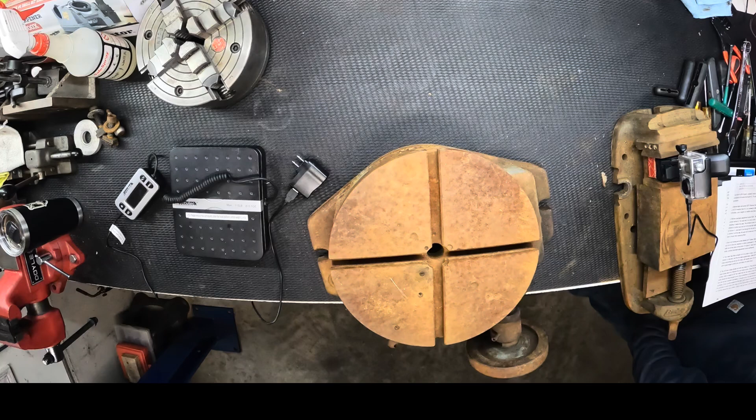This is a Troyke manufacturing company rotary table. It is a BH-12. This is operational, it moves. I haven't spun it all the way around yet, but it is a bear. As we all know, these things are super heavy, but just how heavy is it?

So we're going to see if I can put this up on my scale and see what this guy weighs in at. Let's see if I can make sure it's centered on there. Yeah, 110.

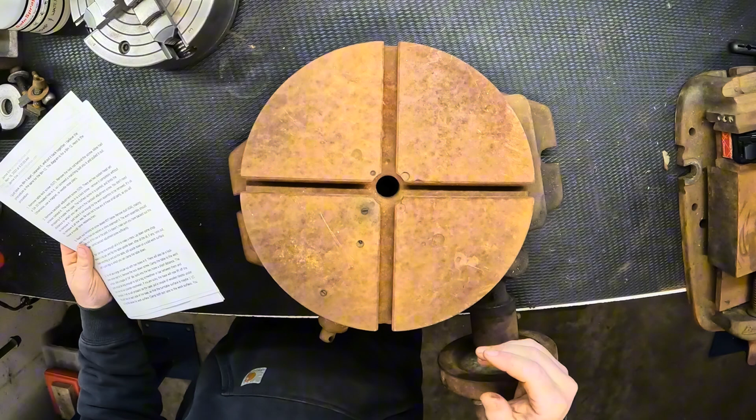So I picked up these instructions off of the Hobby Machinist website, so shout out goes to the username T-Mate, one word. Definitely a great teammate for the group. They've shared these instructions on how to disassemble a rotary table, and also provided some diagrams. So I'm going to follow along with what they provided and see if we can't take this guy apart.

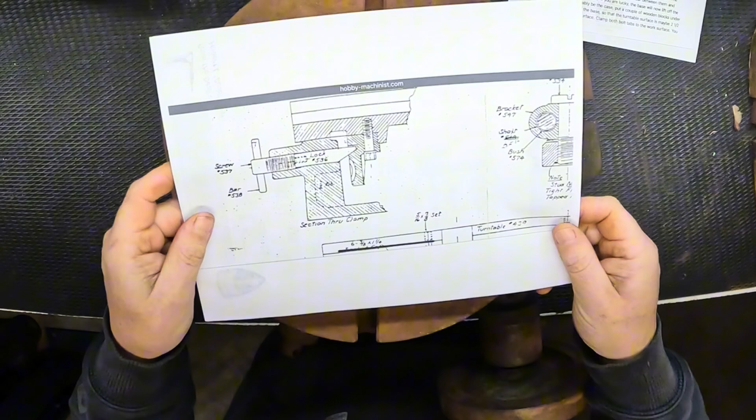All right, first things first, let's see if we can identify some of these parts. So I have the section through clamp. This is a cross-section view, and I believe it's looking right here at this screw, which is used to lock the table. Now it does have this handle, which doesn't really thread in here, so I'll have to fix that up. But can feel how that would - yeah, it feels like that locks the table in.

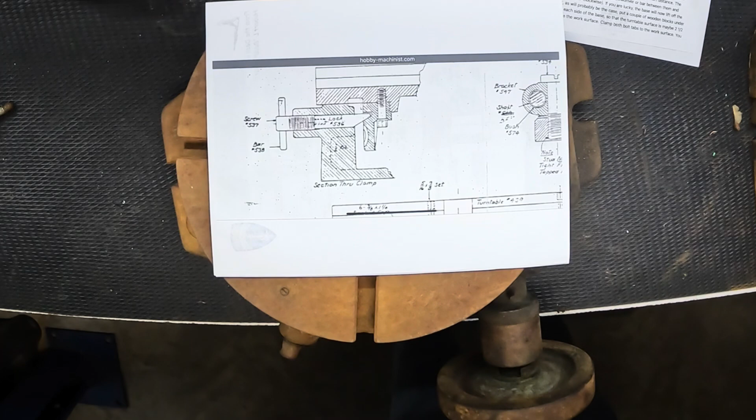So this screw here would be the number 537 table lock screw. All right, so remove the lock rod behind the screw. First thing, let's remove it. So we'll just back this guy off.

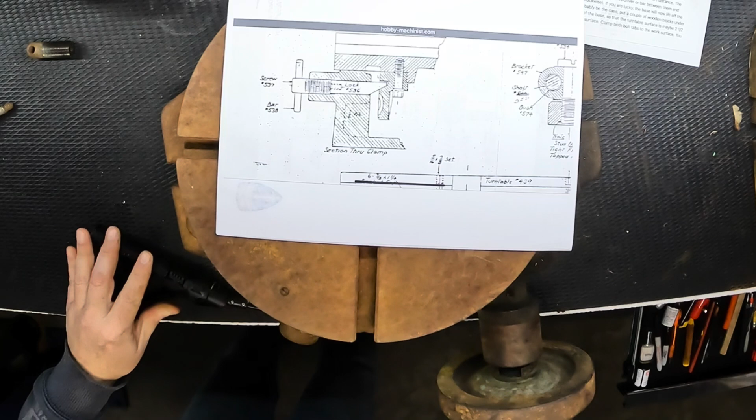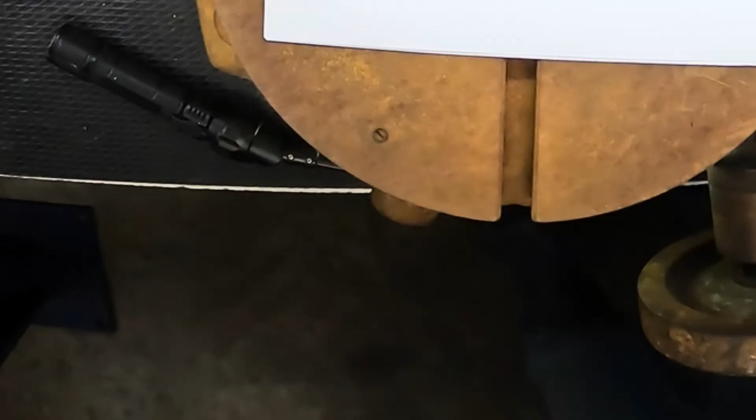Remove the lock rod behind the screw. Mine had a 1/4-20 threaded hole in it, so I screwed in a machining bolt and pulled it out. Otherwise, use a magnet. Oh yeah, okay, you can see that. Let's try a magnet, I have one handy. See if this guy will fit in there. Nope, that one's too big. Nope, magnet won't grab it. All right, that is great advice. That threads right in there nicely.

And we can pull out the lock. Just noting that orientation, the slant is facing down.

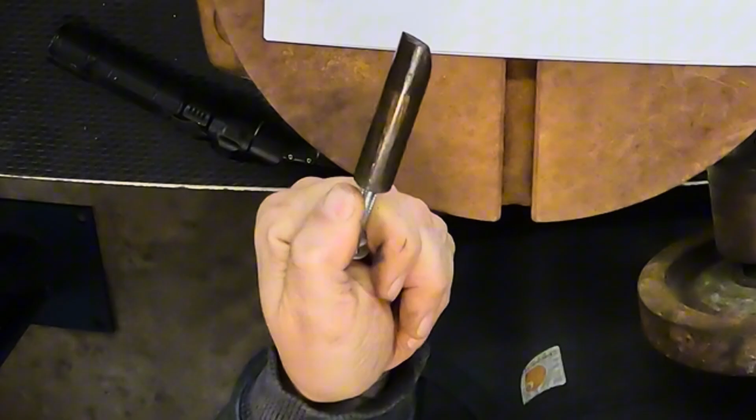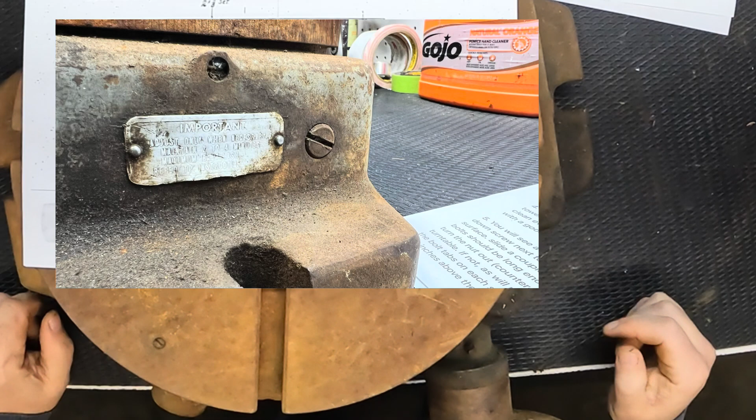Okay, next, remove the backlash adjustment screw, number 529. It's right here, 529. So as we look at the table, over here on the side, it looks to be a - okay, looks like it's over here - a flat head screw. That is just a flat head. Alright, so we'll take this guy out. Alright, so they look to be a 3/16.

And then, yep, there's another one in there. Okay, yep, and this one, remove it without dropping it inside the case. There it is, a little longer. Now the instructions here say that it's pointed. This does not look pointed. Yeah, again, that was not pointed, although on the diagram you can see that it's pointed there.

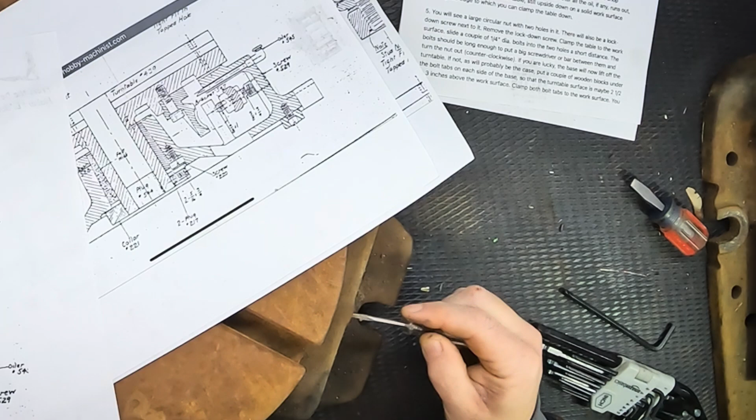So I've got a hole here on the side, it's filled with dirt. And let's see if there's a hex head or socket head cap on the end of this. This is just going in. This actually might be where the oiler goes in. Looks like, I think that is the case, and it is just filled with grit.

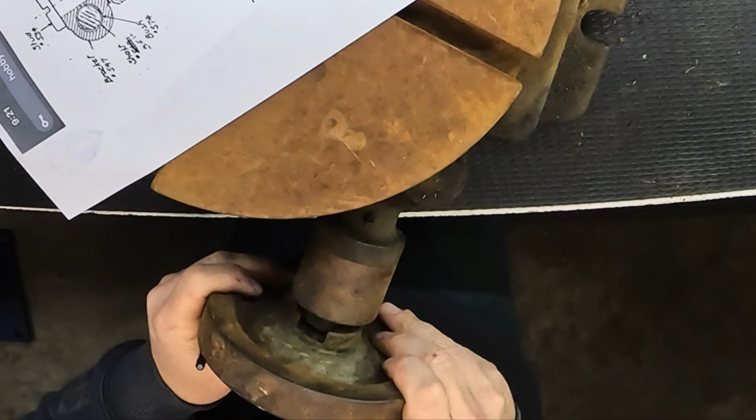This has quite a collection of strange washers. I think the prior owner made a mess of that. Comes off easy enough.

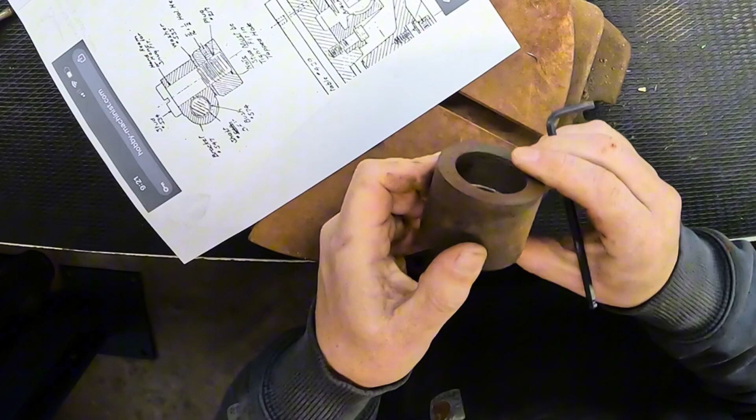So underneath the axle here is another Allen hex head. So we'll loosen this up. So this slides off, part of the scale.

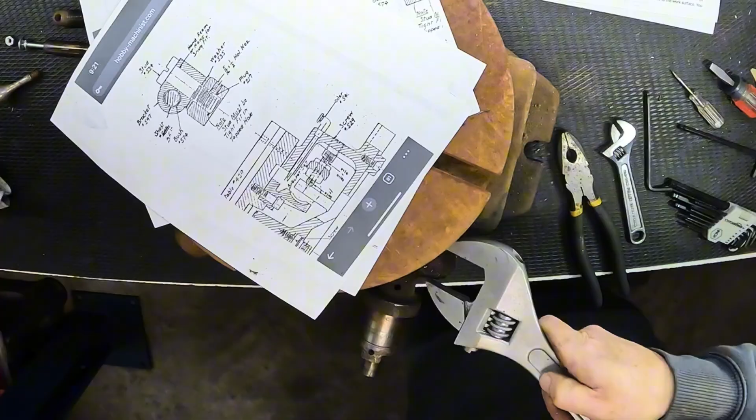Now let's remove the stud, 434. Now I'm only guessing - I have to guess here now that this large hex, even though it doesn't have a flat head groove cut into it, must be the stud. Let's see if we can remove that. I don't see any washers there. It does smell great.

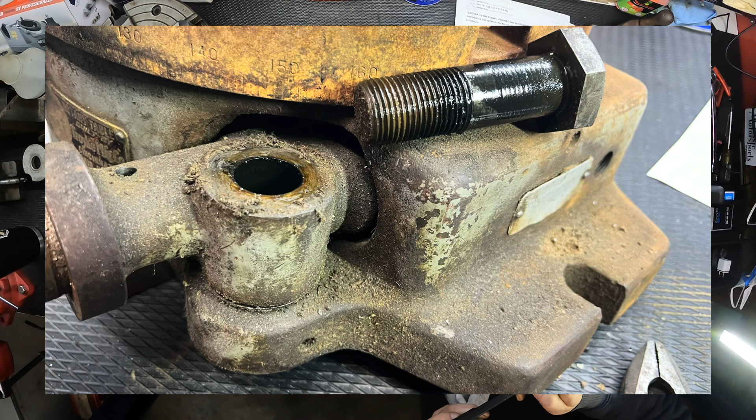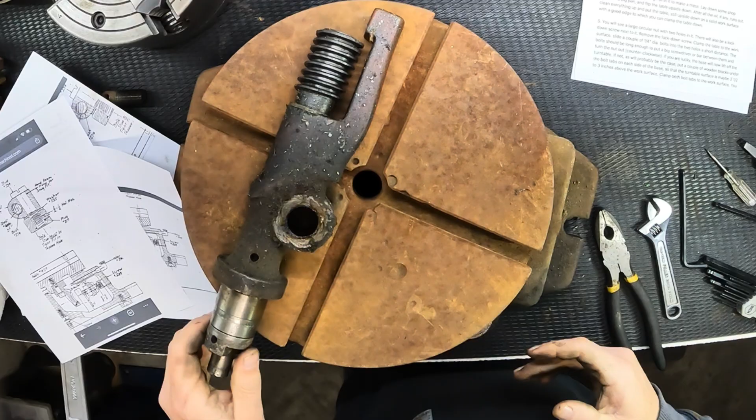Okay, so there is, however, a washer underneath. So we'll take that guy out. And then here comes the shaft. Looks to be in decent condition, gears look pretty good.

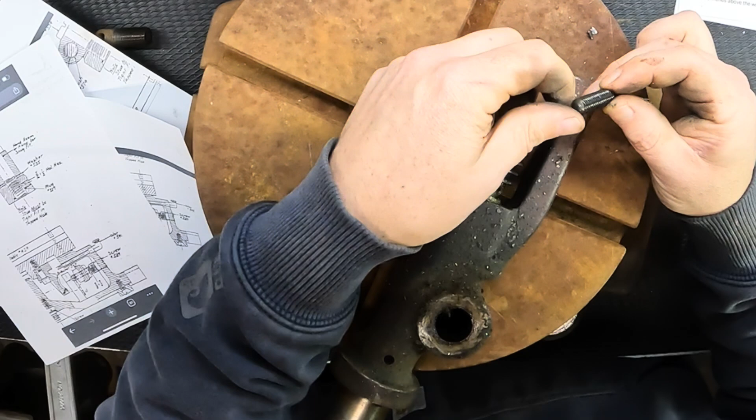It's still unclear to me how this... okay, I see now. So this set screw, which in the description here it says that it's pointed - this one's not pointed, but it does have a surface on it, and it goes through a hole right here. What I'm guessing is that depending on how it pivots on this stud, you adjust your backlash in or out based on how far that guy goes in. Okay, let's see what the inside here looks like.

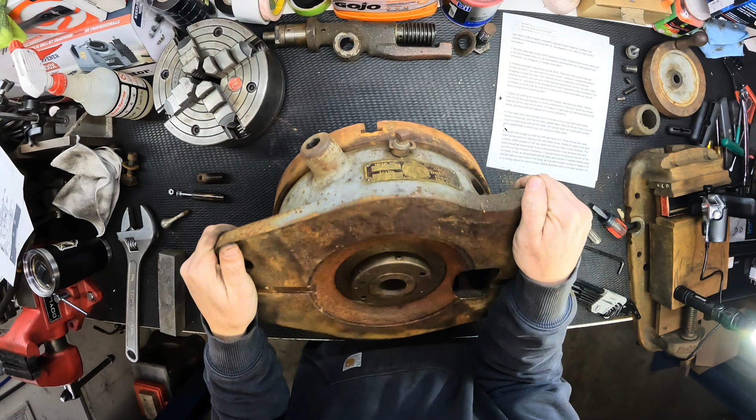You will see a large circular nut with 2 holes in it, as you see here. There will also be a lockdown screw next to it. It does have a set screw on the side. Maybe that's what he means by a lockdown screw.

And the recommendation is to put some bolts in here so that we can spin this off counterclockwise. All right, so let's remove this set screw. All right, that should do it.

And I'm going to make just a couple of marks here, just in case this needs to line up again afterwards.

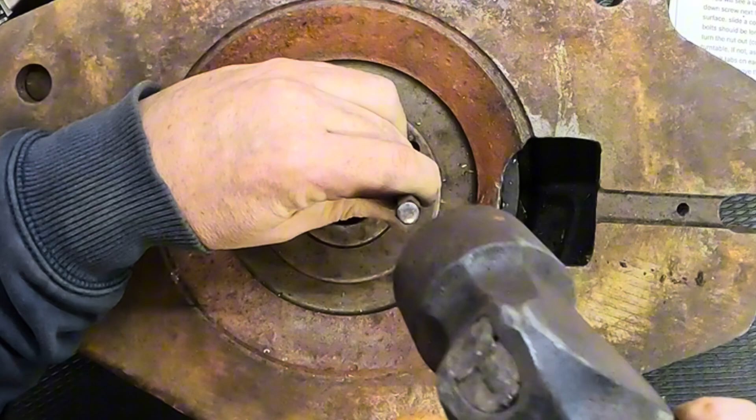Now let's see if we're lucky. All right, these don't go down very deep. I don't think I have a pin wrench that big. All right, I do have these. We'll take out the largest crowbar and see if we get lucky.

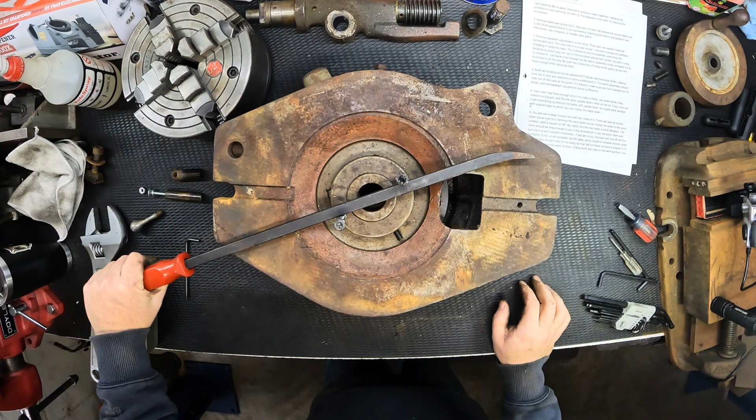Okay, let's see. That wasn't so bad. Although, reading it again, I think he says you're going to be lucky if the table just comes off. Okay, so this was maybe the easy part.

So, can we lift? Oh, we've got this guy, gotta get him out. We get the table and the base separate. Yep, okay, we will be. It's heavy, where am I gonna put it?

Oh, what a chippy mess. Wow, yeah, full of chips. It's like a heavy brake drum.

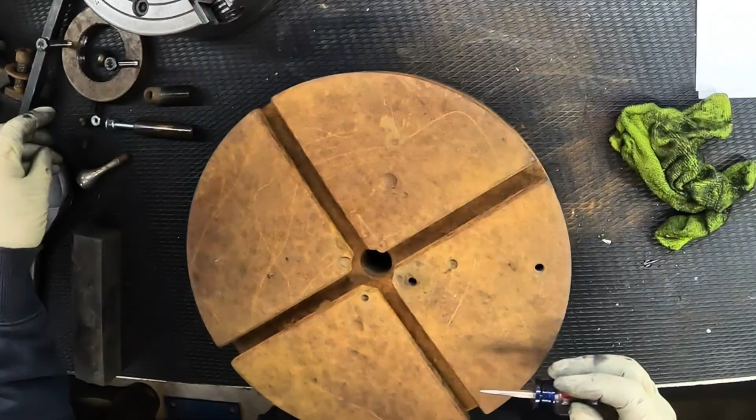This guy is now clean, and it's going to go take a bath in some Evaporust.

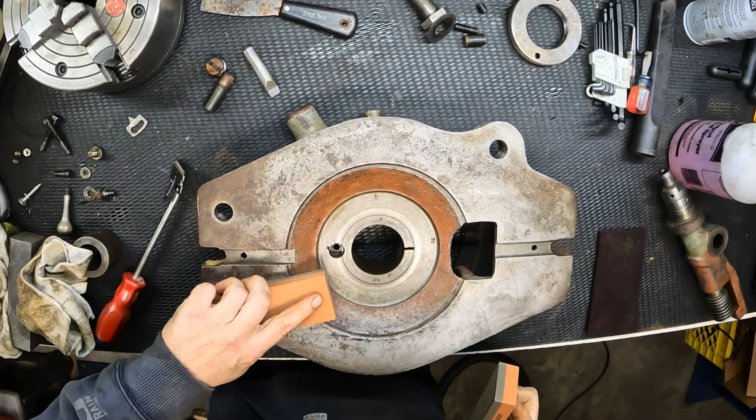And the secret tip to cleaning these is WD-40 and cardboard. Works great, when they start getting grungy, you can clean them up real easy with that.

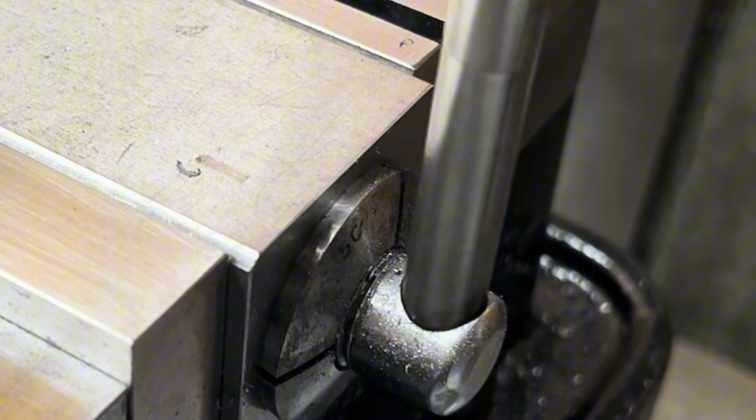So for this knob, I went back and forth on how exactly I'm going to get it to fit into this section here. So what I've decided to do is I've recessed this a little bit so that the shoulder of the handle will kind of fit in there. And then what I did was I made a little plug that will thread into that, and it should have a press fit into here.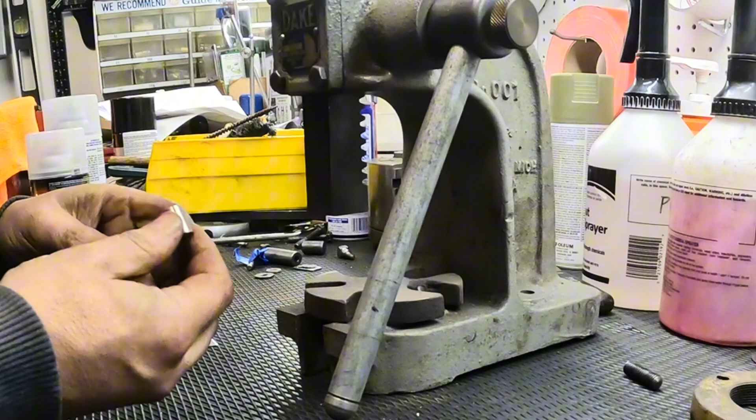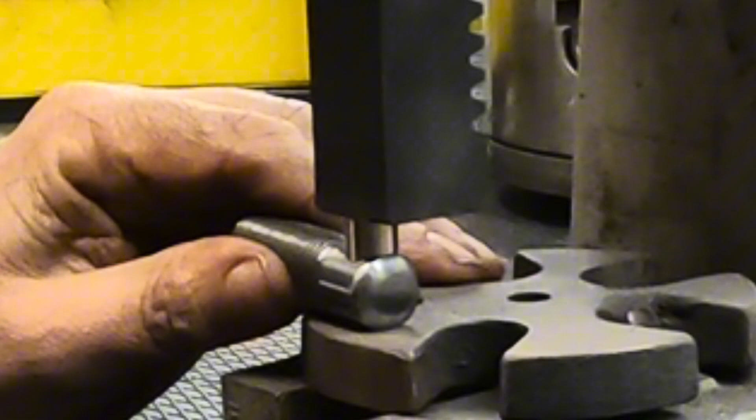Let's see if that worked. All right, so that went in nicely.

And then this thing, hopefully, nice, that will screw in. All right, I'm going to bring this over to the lathe and trim that off.

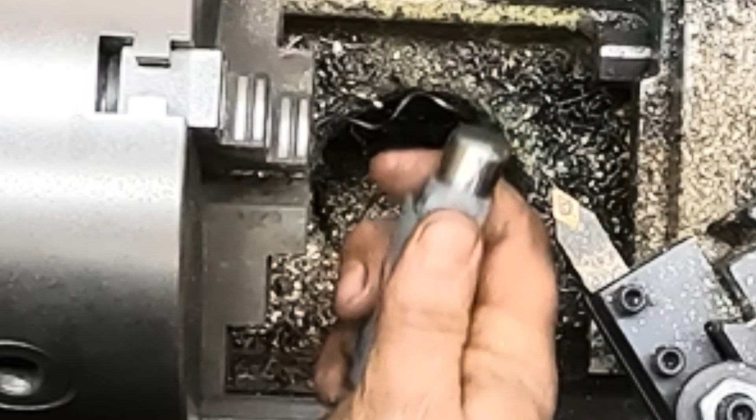All right, so here it is. I am pretty happy with that. That should look nice.

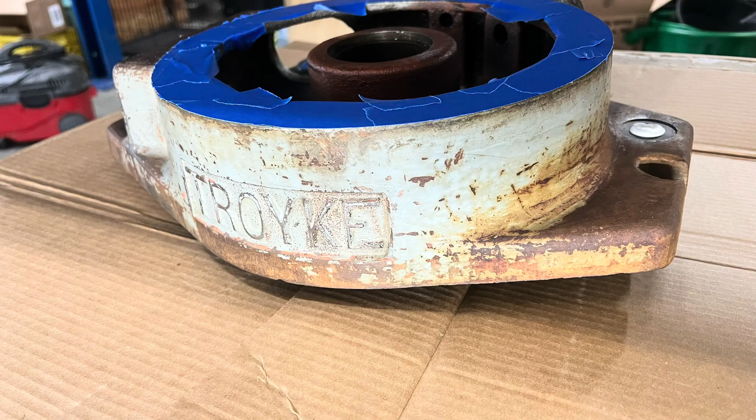All right, so just checking in on the base. I want to give you a look here. Got it painted and just waiting for it to dry.

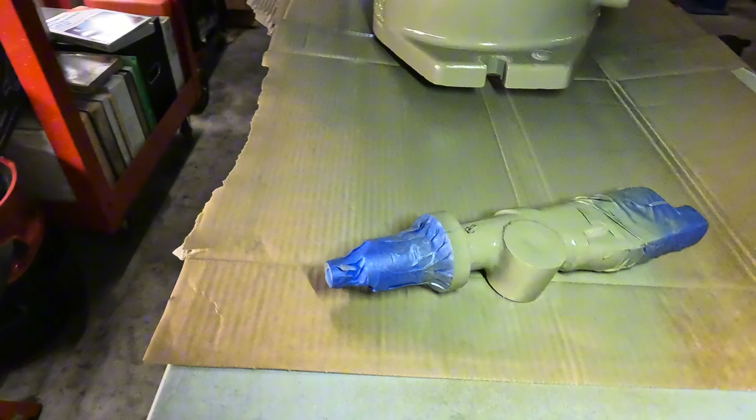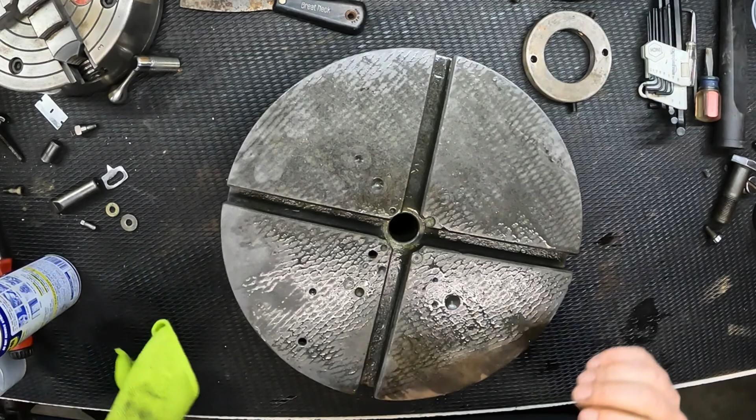All right, so here's the top, fresh out of the Evaporust. And as always, that stuff works really well. Really well.

So I'll just go through, we'll clean this up and start reassembling this table.

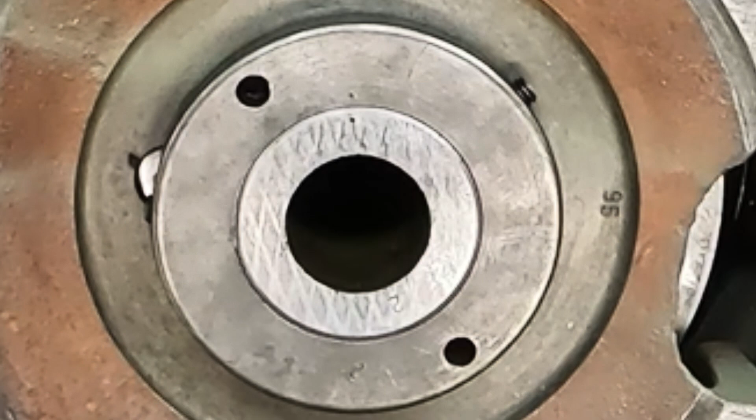Right there, there's the witness marks. Yeah, we're gonna leave it right there. Sometimes my foresight is helpful. I would say that was one of those times.

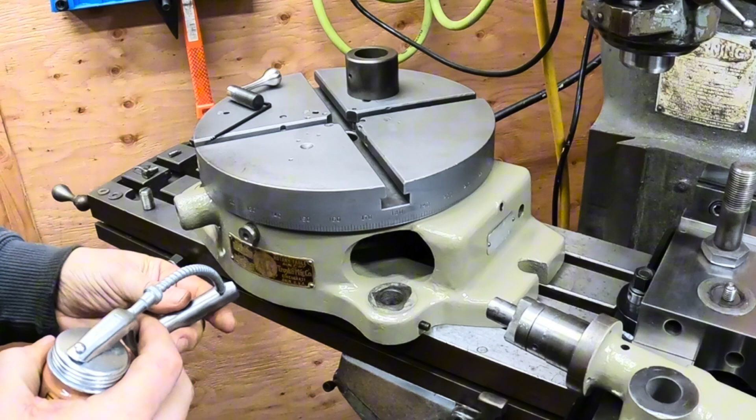Reassembly of this unit is basically the reverse of removal, with the exception of adjusting the backlash. So I'm going to save that for last. Put the locking bolt back in.

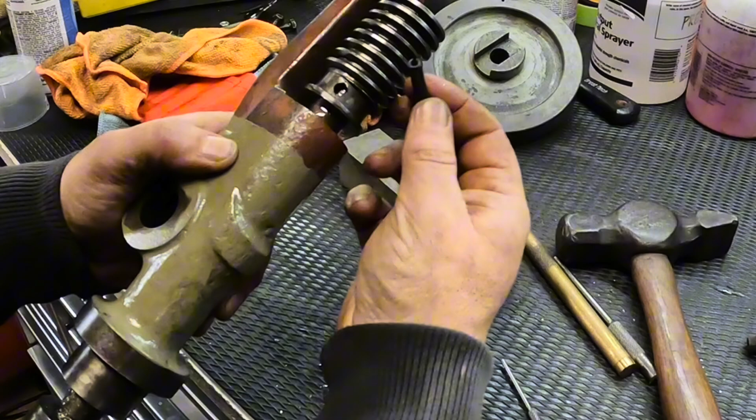Well, I wasn't very happy with how the handle was spinning. It felt like it was binding up a little bit. So I pushed out this pin that holds in the worm gear, and with a brass punch, I started pushing the shaft out. And yeah, I'm glad I did this. Look at all that metal grit and crap and chips that are in there.

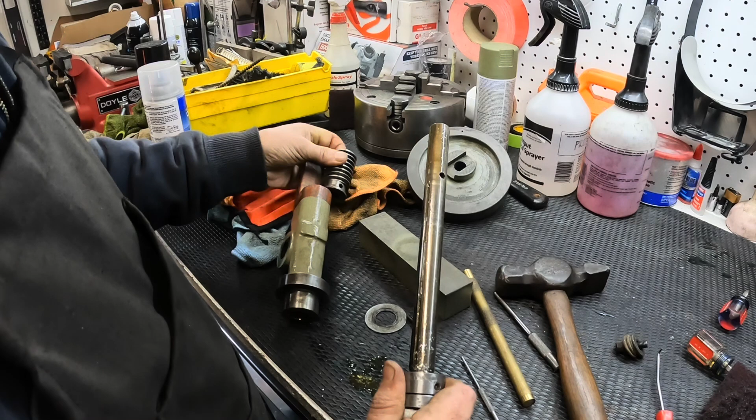So I thought I would pause and let you see that part of the assembly. Again, I didn't want to put it back together, it didn't quite feel right. So yeah, chips everywhere. I'll clean this up, slide it back together, get that roll pin put back in, and we'll be back in business.

So the shaft has some scoring. This is where some chips had got in there. So I'm just going to run this over to the Scotch-Brite wheel, take off any high spots on that.

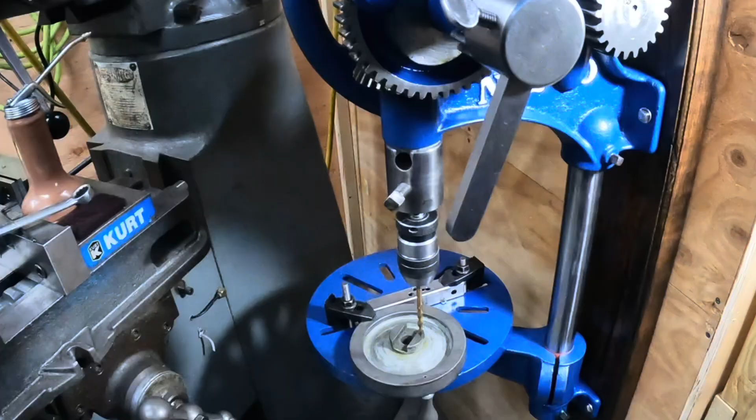So the general consensus on how to get this handle off was to heat this up and kind of drive it down by punching it out. Now that hole is just so small that I'm going to make it a little bit bigger so I can get a punch in there that actually won't bend. And luckily for me, I have this new drill press. So let's get this bad boy fired up.

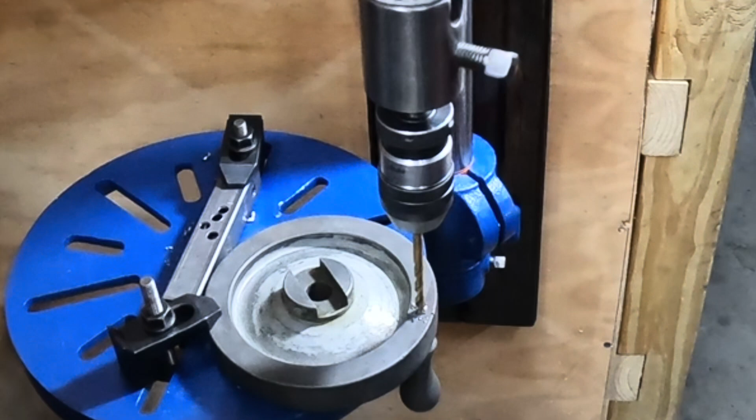All right, here in the annex, I have the handle on the press. I've drilled out the hole a little bit, and I have this screw which fits in there nicely. It's kind of stout and should be enough to push this through. I'm going to try to do this instead of driving it out with a hammer. I feel like this might be less traumatic, and we'll kind of know based on the feel of the press if it's working or not.

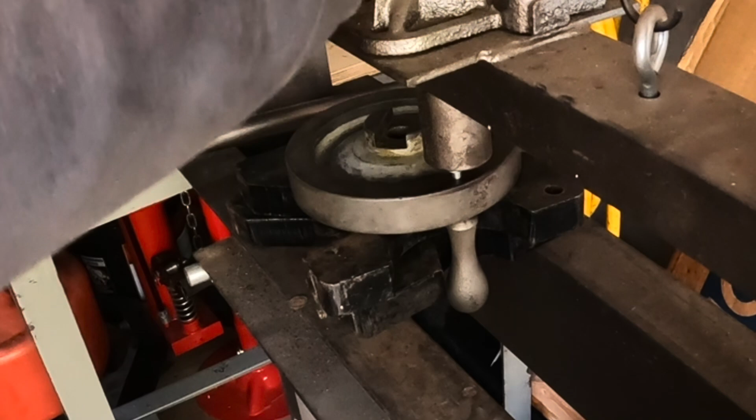Oh yeah, it's going right in. And the handle's coming right out. Perfect.

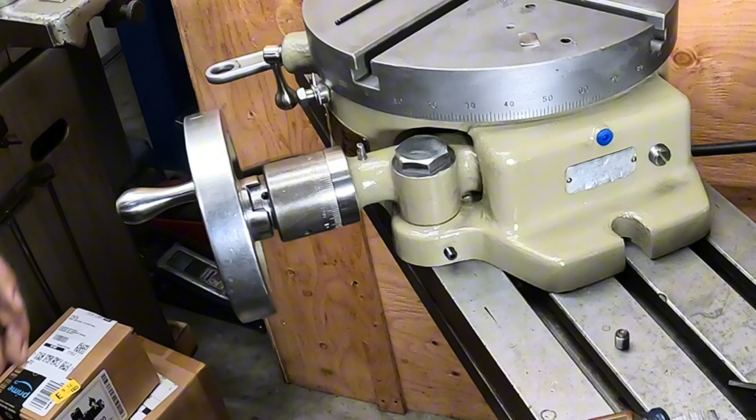All right, moving on to setting the backlash. There's a series of steps we're going to do here on the back. But the first thing is I want to get this stud fixed. I don't want it so tight that we can't move it, and we don't want it loose so that when I pick up on it, it rocks. So I want to keep it able to move without it rocking, and then we'll lock it down with the lock screw.

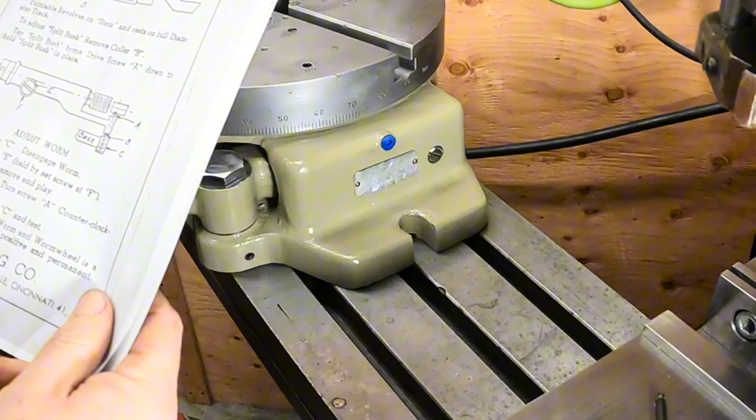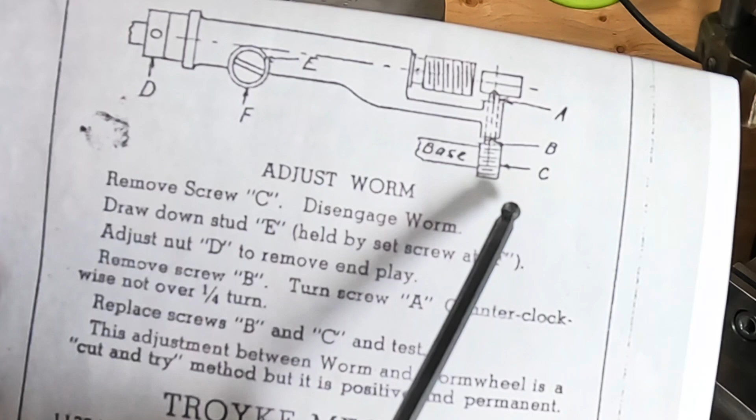To set the backlash on this is definitely a bit of trial and error. So here's the mechanism we're looking at, and we've got two screws. We've got the long set screw, B is the locking screw, and C is the exterior screw. You can see this is the C screw right there.

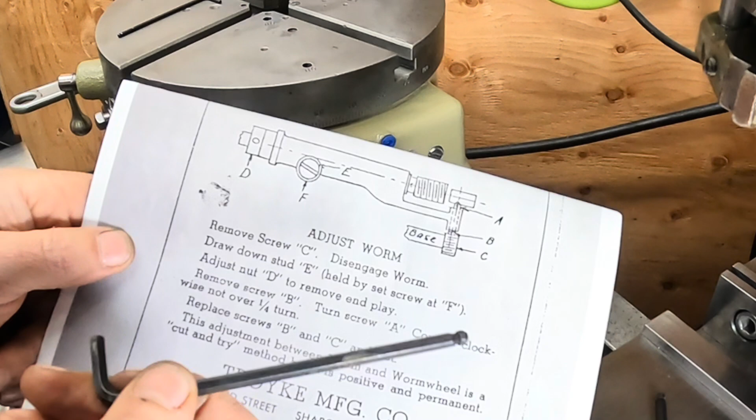These directions are a little bit unclear to me exactly. There's a part that says remove screw C, so we'll take that out. Draw down stud E, which is the main piece here. It says draw down—I don't know what draw down means. So I've adjusted it so that I can move the worm gear mechanism freely without there being too much play.

Next, adjust D to remove the end play. So D is over here. There's no end play in it already, so I didn't have to do anything with D. All right, now remove screw B, which is the set screw, and turn screw A counterclockwise, not over a quarter of a turn. Replace everything, and then test.

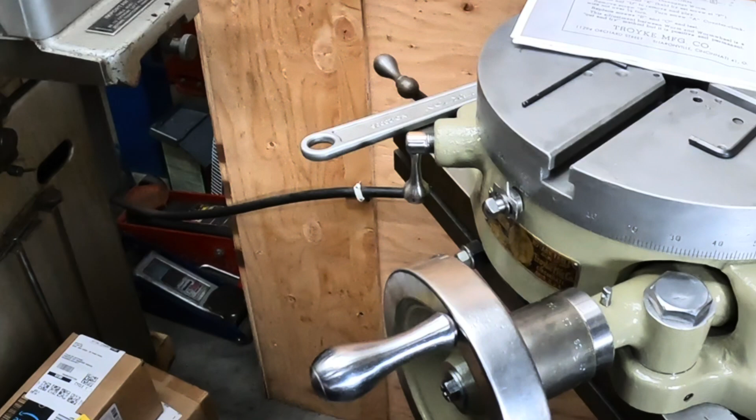What's unclear to me is where do you start screw A? So I've just been starting at different places, and I have the results kind of where I want them right now. I'm not sure if you can see this, but what I'll do is bring this around to zero.

Let me go the other way. So I'm going to take the backlash, I'm at 0. And then how far until I get movement the other way? I'm at, looks like about 8 before it starts to go the other way. So I've got about 8, I think that's minutes. Could be 8 degrees. It's 360. No, I take that back. 220, 240. There's 240 increments here.

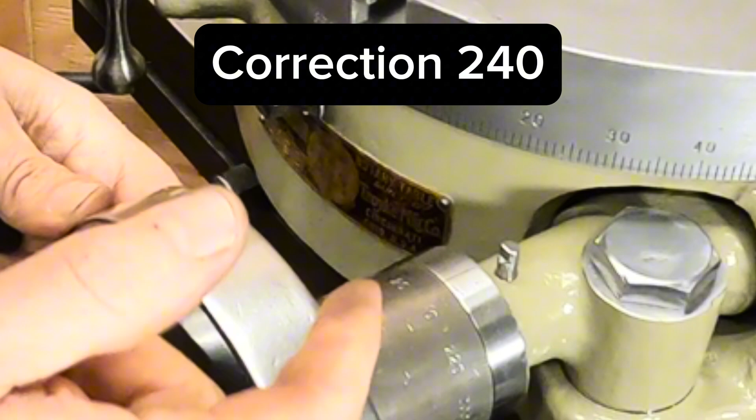So I don't exactly know. I know there's some minutes and seconds going on here, but what I'm going to say is that I'm looking at 8. Okay, so let me go one more step to show you how it works to see if that changes at all.

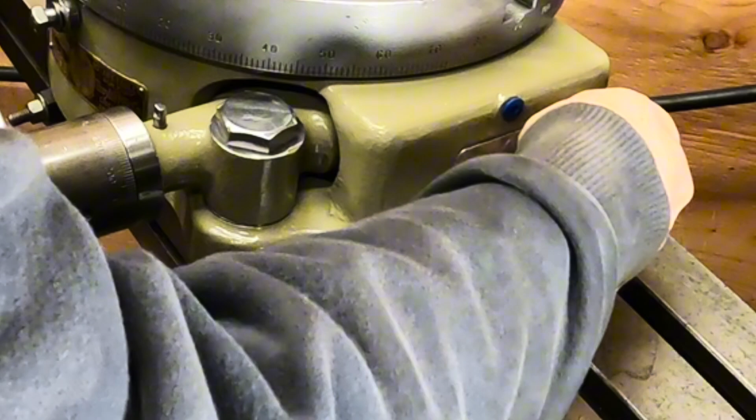So we're going to remove, back here, remove C. Going to remove the set screw, the locking set screw. And now the main screw, I'm going to back that off 1/4 of a turn. Okay, and I'm going to put everything back in. Lock it down.

Tighten that up. Okay. Oh, all right. Can't even move the handle. So that is too far. I guess that's good to know, right? So that's too far. Let's unwind everything.

So probably the #1 lesson is it doesn't take much. Once you get it close, you know, the idea of turning it 1/4 of a turn at a time really is appropriate.

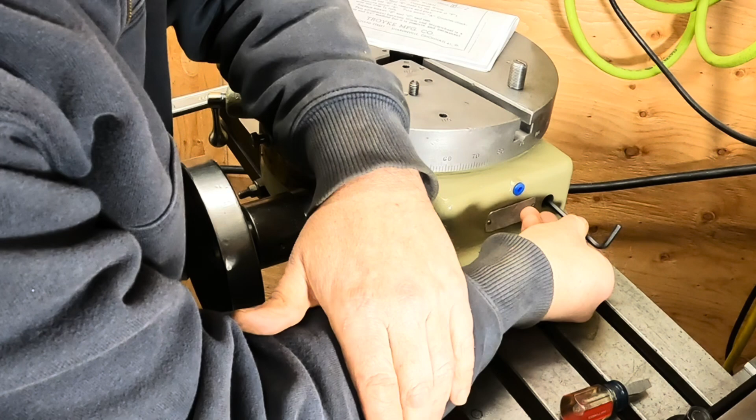So I'm going to take this and put it about 1/8 of a turn back to the right. All right, I think I got it now. Okay, so we're going to go back to the right 1/8 of a turn. Lock screw. All right, still too tight.

All right, now I'm definitely in there. I'm going to go 1/4 of a turn clockwise. And we're back to having movement again. All right, now let's check the backlash here.

All right, now I'm at 10. Yep, 10. So I lost a little bit. So if I back that off ever so slightly, let's see if we can, we'll try another 1/8 turn backwards. So there, I'm in. So I'm going to go 1/8 of a turn right there.

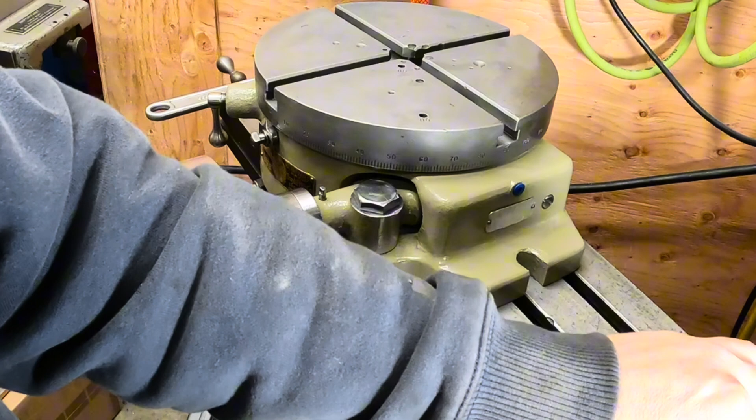I'm going to get some sort of an oiler here to cover up that hole. In the meantime, I just have a rubber plug. Let's get some oil in there. Seal it up.

That guy's tight. Set screw. This is all set. So underneath this is also another place for oil. Get some oil in there. All right, and plug that back up. And we've got a couple of spots here on the table itself. Give that plenty of oil.

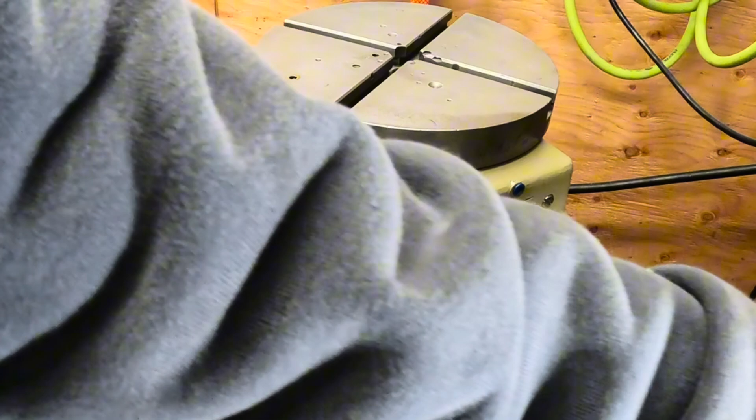Got a couple of caps that we'll put in. Well, there it is, done. This guy came out great. I'm really happy with it. The movement is nice and smooth. I can't wait to get some projects where I can use this guy.

For now, I'm going to leave it on the table. These are a bear, right? It's over 100 pounds, around 110 pounds. So we're going to pick a home for it, and hopefully I don't have to move it too much. But I'll be keeping my eye out for an 8-inch. I think an 8-inch would be perfect. And but for now, I've got this 12-inch one, and we'll make do with it.

But it's been a really fun project, kind of bringing this guy back to life. And I do appreciate you watching my video, and consider subscribing if you'd like to see more projects like this